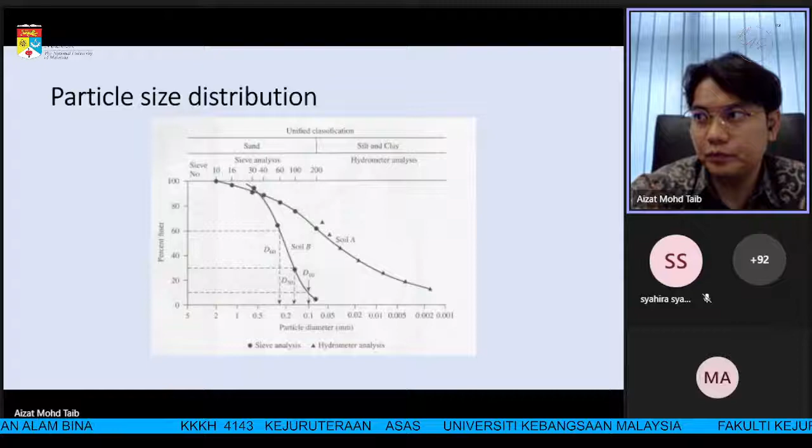This is the sieve analysis, conducted by taking a measured amount of dry soil and passing it through a stack of progressively finer sieves with a pan at the bottom.

So when you run your sieve analysis, at the bottom there must be a pan. If it's not a pan, everything will go off and there's no point. You still get the grain sizes in between, but except for the bottom, if you don't use a pan, you don't get the smaller sizes.

The amount of soil retained on each sieve is measured, and the cumulative percentage of soil passing through each is determined, referred to as percent finer.

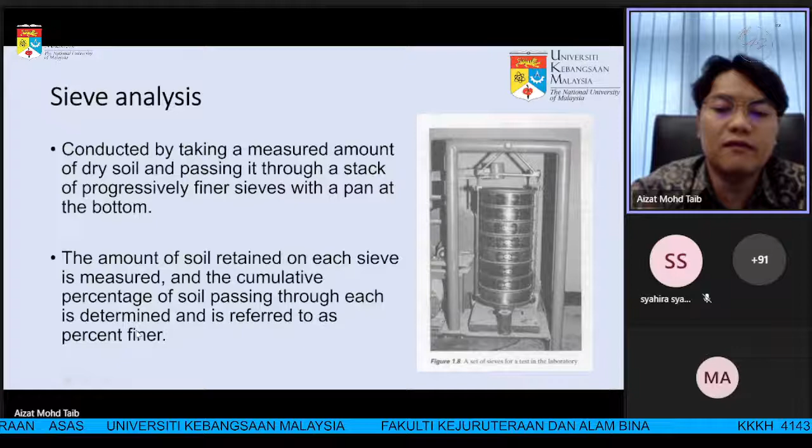Geotechnical properties of soil: percent finer for each sieve is determined by sieve analysis and plotted on semi-logarithmic graph paper. Imagine if you don't use a logarithmic graph pad.

Let's say this distribution is very far apart. Imagine if you use an even scale, so maybe 10 here, 9 here, then here will be the same decimal number. The curve would be forever long until the end. That's why you have to use logarithmic paper.

Notice that grain size diameter D is plotted on logarithmic scale and the percent finer is plotted on arithmetic scale. So this is arithmetic, this is logarithmic.

Two parameters can be determined from the grain size distribution: the uniformity coefficient, Cu, equals D60 over D10. So you go to 60% and 10%.

You can get the uniformity coefficient, and the coefficient of gradation or coefficient of curvature, Cc, equals D squared 30 over D10 times D60. These are all percentages - you've done this already in your lab work and soil mechanics. D10, D30, D60 are the diameters corresponding to percent finer than 10, 30, and 60% respectively.

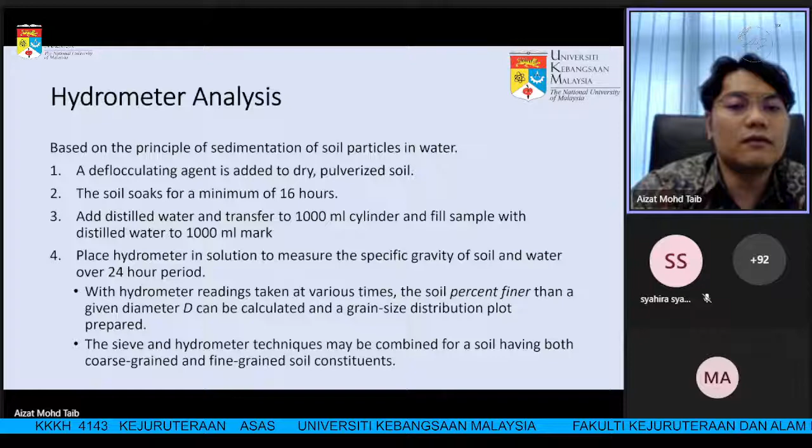All of this, when you run it in the machinery, they are doing it for you. At the end of the day, you're just going to get your fine grain size distribution. I leave this to you - I'm pretty sure you can read and revise again what you have done before in the hydrometer analysis.

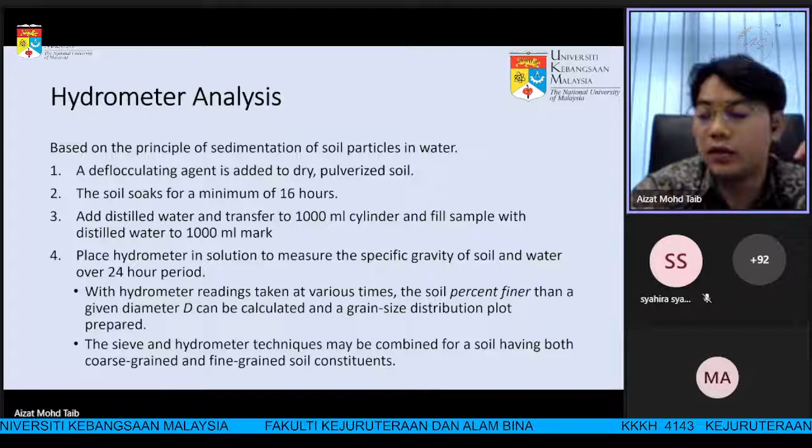Size limits for soils: several organizations have attempted to develop size limits for gravel, sand, silt, and clay on the basis of grain size present in soils. So we use AASHTO or USCS. AASHTO is the Association of State Highway and Transportation Officials, so mostly people in the roadway or road path will use AASHTO.

A unified soil classification system is more for other respective purposes. Now, Atterberg limits - it shows your liquid limit, your plastic limit, your shrinkage limit.

It shows your soil formation - when clay soil is mixed with an excessive amount of water, it may flow like semi-liquid. If you have a little bit of water, your soil tends to bind together, but if it's completely dry, it's very hard for them to bind. So if the soil is gradually dry, it will behave like plastic, semi-solid, or solid material depending on its moisture content.

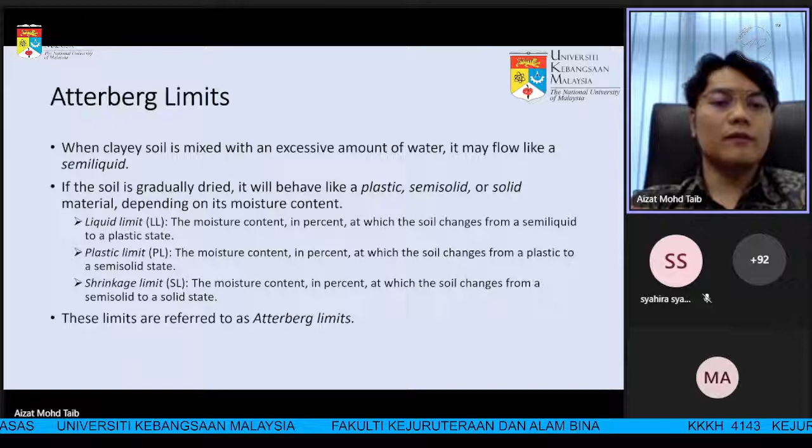LL is the liquid limit, plastic limit is PL, and shrinkage limit is SL. I'm pretty sure you know all this - these limits are referred to as Atterberg limits.

Liquidity index is the relative consistency of a cohesive soil in its natural state. Li equals W minus PL over LL minus PL, where W is the in situ moisture content of soil.

What is the unit for moisture content? Anybody? E? Huh? E. I'm asking about the unit, not the symbol. Symbol is W, water content is W. What is the unit for water content?

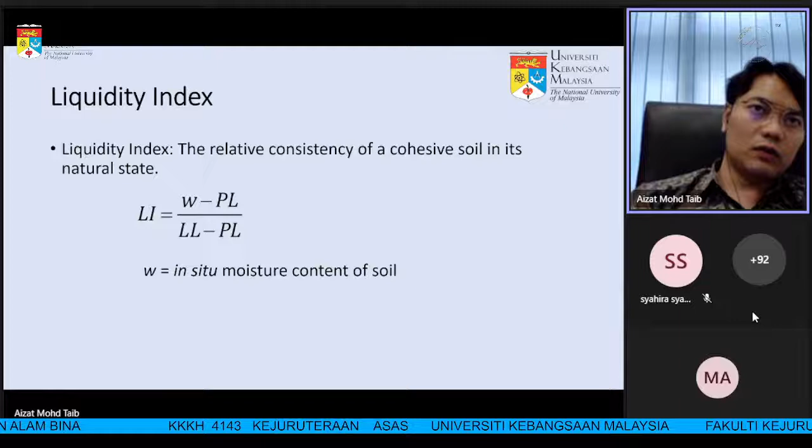Percentage, okay, very good. Water content - the unit is in percentage. It's not in kilograms, not in grams, not in weight, not in other units, but percentage. So how much water in a specific amount of soil is calculated in percentage for moisture content.

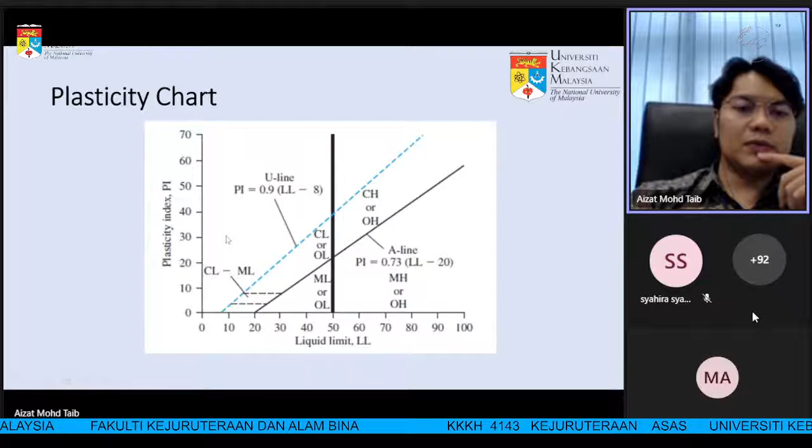Plasticity chart - this depends on your soil group. You have CL, ML, CH, OH, and PI determines where you are. It's plasticity index PI against liquid limit LL.

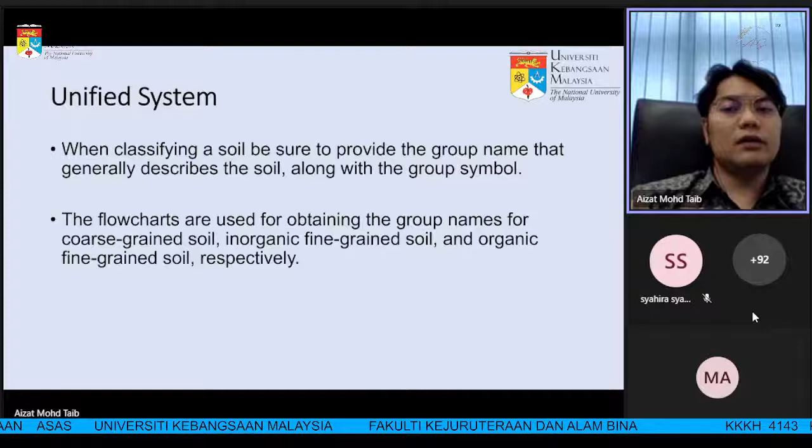So if you do your sieve analysis, you know how much percent for coarse grain, and then you decide whether it's gravel or sand, whether it's clean gravel and clean sand or sand with fines. It all depends on your percentage.

If it's fine grain soil, you use this one: 50% or more passes the number 200, so if it passes 50%, it's fine grain. If it's less than 50%, it's coarse grain. Then you have the silts and clay, whether the liquid limit is less than 50 or more than 50. At the end of the day, you get your group symbol and then your group name, and all the respective procedures can be seen here as well.

So your coefficient of uniformity, CU, is D60 over D10, and then your CC is this one. So all of these are here.

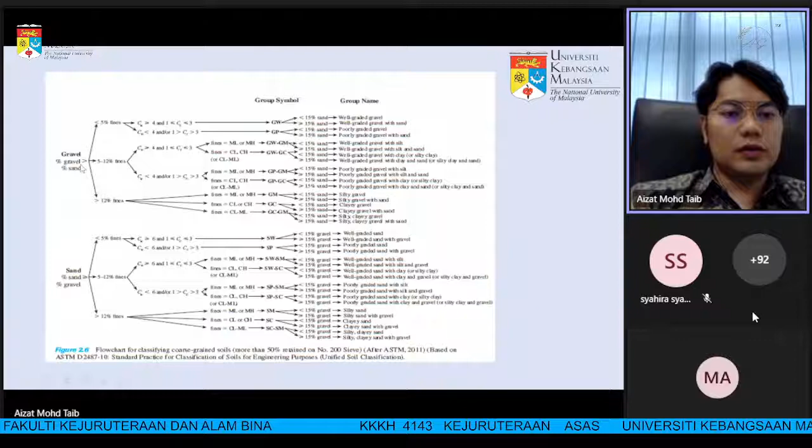And then the group symbols and group name depend on the sand and gravel percentage as well. So, the unified system, symbols of the unified system, are the following. I'm pretty sure you understand them.

Weight volume relationship. You've done this before. Soils are a three-phase system consisting of solid particles, water, and air. The phases can be separated, and based on the separation, the volume relationship can be defined.

So you have your volume and weight on this left side. V is volume, W is weight. So volume equals to what?

Anyone? Doktor, apa tadi? Volume equals to what? V equals to E? What ratio? Saya tanya pasal V, the big V. This big V equals to what? V equals to W? Okay, that's good, but I want answers in volume. So big V equals to how many V's? 3 V's.

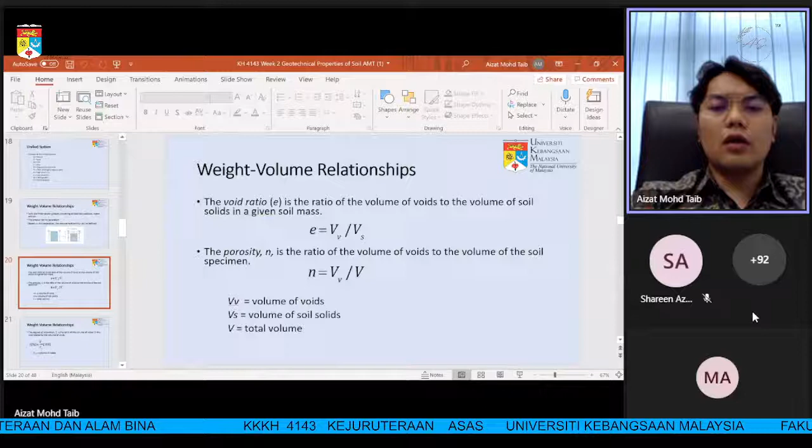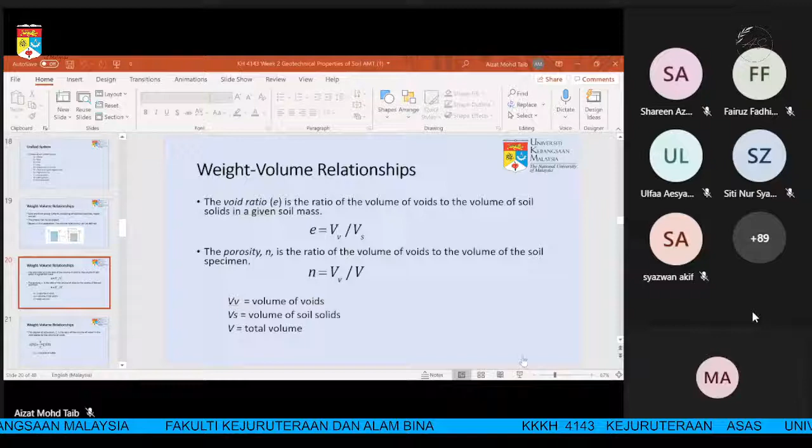Water, air, and solid, with VB. V equals to V air, V water, V solid. W equals to WA, WW, WS. Same also, W is equal to W air, W water, W solid.

WA is equal to 0, because air doesn't have weight. Betul ke dia tak ada weight? Awak rasa? Rasanya betul tu doktor. So WA is equal to 0. So air, the weight is negligible. We assume the weight is negligible.

So for W, we calculate WW plus WS only. What is WW? Weight of water. What is WS? Weight of solid. What is VV?

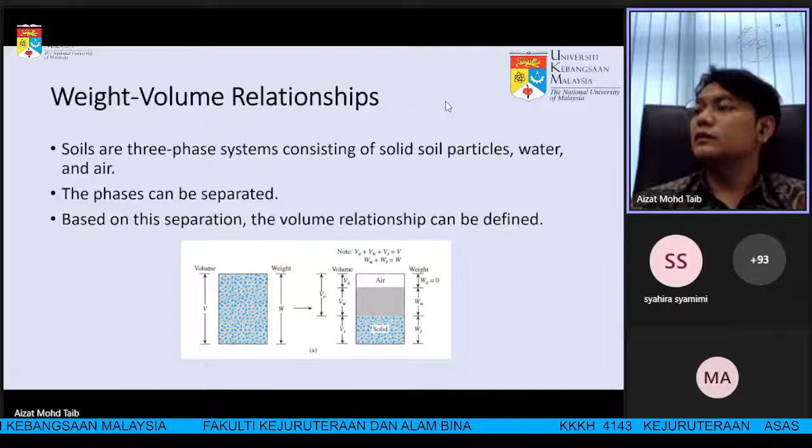Volume void. What is volume void? Adila? What is volume void? What is VV? Volume void is volume air plus volume water.

Sohail? Sohail ke Suhail? Suhail, where are you? Sivanesan. Siva, where are you? Ya, doktor, how many phases do we have? Doctor, I can't hear properly, the line is lagging. How many phases do we have in soil? Siva. Rizwan, ya doktor. How many phases do we have in soil? Three, doctor. Okay, they are? What are they? What are the phases? Solid, liquid, and gas, doctor.

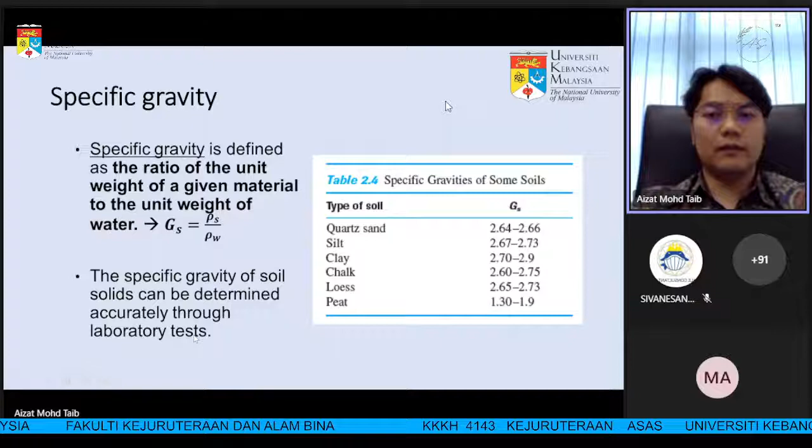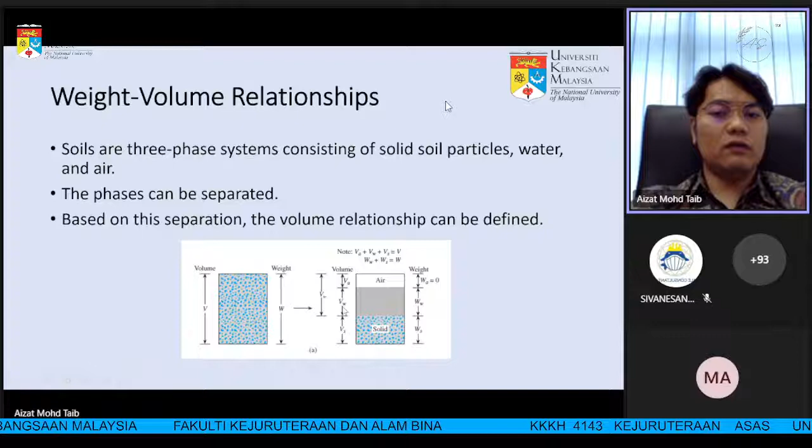So as you can see, this is the weight-volume relationship. Knowing all this, you can derive from the main equations, like VV equals VA plus VW, and W equals WW plus WS. You can derive and form other equations from all of this.

Such as WS equals GS times gamma water. What is WW? WW means GS gamma water times water content, and with 1 plus water content you can simplify this.

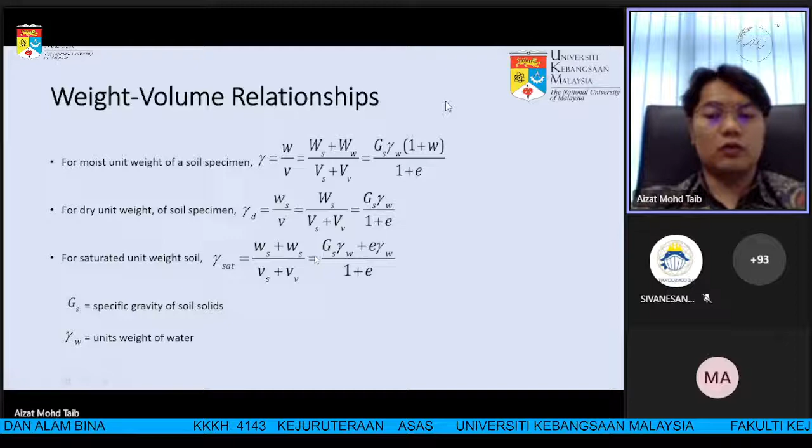This is for dry unit weight, this is for saturated unit weight. You've done this before, this is just recap, you can read this on your own. Various forms of this relationship, you're well aware of this, you've used this before. It's just a matter of different derivations, depending on what properties you have.

Let's say you want to calculate dry unit weight with water content - this is the equation. If you want dry unit weight with specific gravity and void ratio, this is the equation. If you want to calculate with saturation, this is the equation. It's the same for all of these.

Soil compaction, relative density. For granular soil, the degree of compaction in the field can be measured according to relative density. E max is the void ratio of the soil in the loosest state, meaning the void ratio is at its highest - very, very loose. E min is when it's the densest.

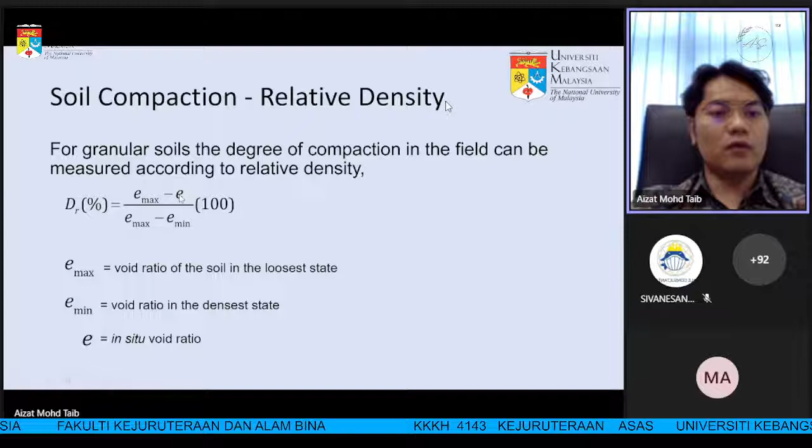When you have different void ratios, the relative density is E max minus E, over E max minus E min, times 100%, where E is the in situ void ratio. The equation is E max minus E min equals 0.23 plus 0.06 over D50 in mm.

D50 is the percent finer for 50%, and then you find at what size that occurs.

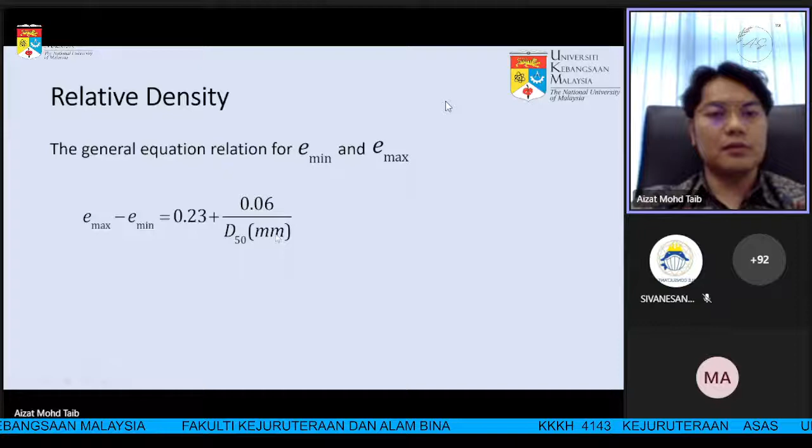Hydraulic conductivity is about water flowing through your soil. You've done this before in the lab, so you understand permeability. Permeability is in relation to hydraulic conductivity. Water flows between void spaces or pores between soil grains. Knowing how much water is flowing through soil per unit of time is important for soil mechanics and foundation engineering.

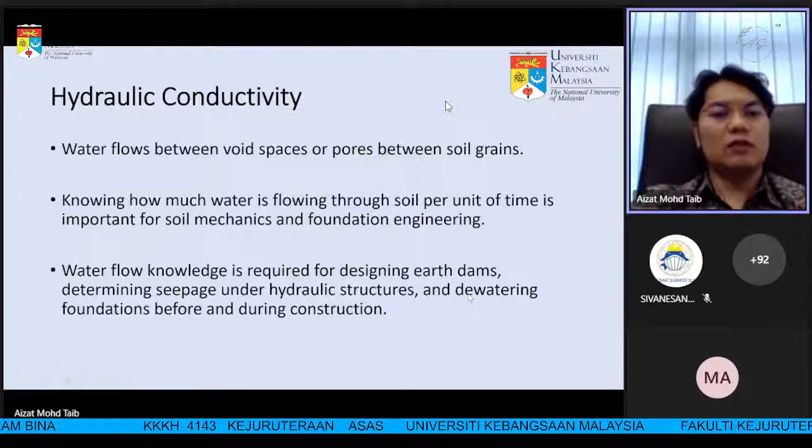Imagine if you do seepage analysis, you have to know how much water is passing through the soil. So it must be a rate, how much water over time. Water flow knowledge is required for designing earth dams, determining seepage under hydraulic structures, and dewatering foundations before and during construction.

The equation is V equals to KI. It's used to calculate the velocity of flow of water through soil. I is the hydraulic gradient. You cannot have water flowing without a gradient. If the gradient is all the same, there's no hydraulic gradient, you cannot have water flow.

Imagine if you have one container, and there is no difference in the hydraulic gradient, no difference in the height, so there's no flow. But when you lift the container slightly, a little bit higher on one side, then you will start to see the water moving. It is because you have the hydraulic gradient.

Hydraulic conductivity is the coefficient, and Darcy velocity is the rate of hydraulic conductivity. Hydraulic gradient is defined as I equals to delta H over L. As you have changes in the height, changes in the head between two sections, then only you have water flow. So I is delta H over L.

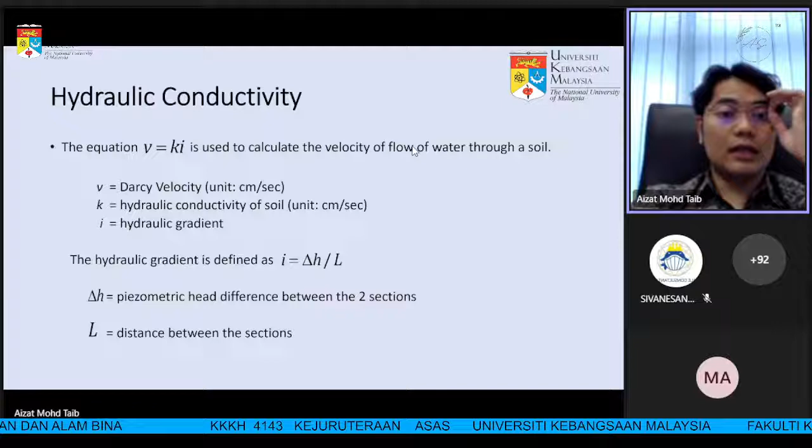L is the distance between the two, clay and coarse grain. So as you can see, between coarse and clay, and between coarse and finer material, which one will allow water to pass more and faster?

What was the question again, Doctor? In between coarse and finer material of soil, which one will allow water to pass faster and easier?

Coarse. Okay, so imagine if you're by the beach, if you pour some water, you can see that the water easily seeps into it and goes way deep under the ground. But if you pour water on clay material, let's say after rain on a football field, sometimes you see a pool of water in between the grass, because the soil is either peat or clay material. So it doesn't allow water to pass through easily. That's why you have that pool of water.

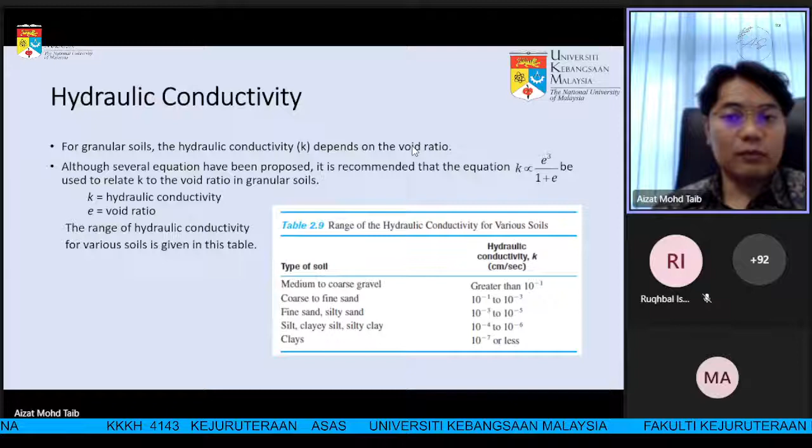So every soil particle will have a different type of hydraulic conductivity. For steady state seepage, in most cases of seepage under hydraulic structures, the flow path changes direction and is not uniform over the entire area.

When you have a difference in hydraulic gradient, the water will follow where the lower gradient is leading to. Imagine you spill water, it will move following its hydraulic gradient. So for most cases of seepage under hydraulic structures, the flow path changes direction and it's not uniform over the entire area. It depends, it's not uniform.

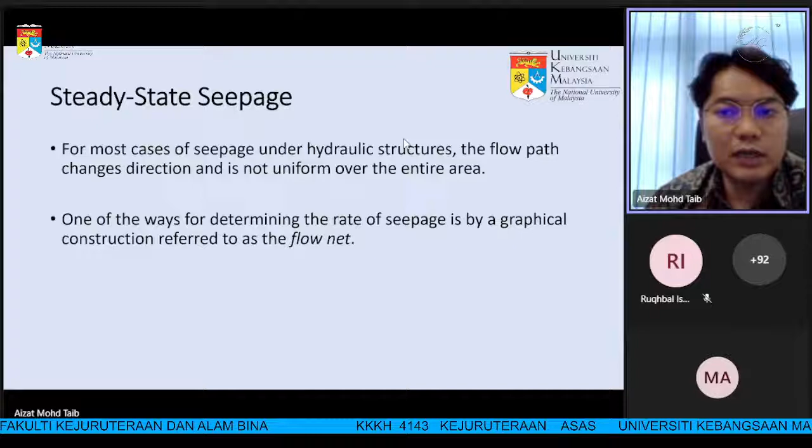One of the ways for determining the rate of seepage is by graphic construction referred to as flow net. We've done flow net before. How do you draw the flow net? If you remember in flow net, what is the most important thing?

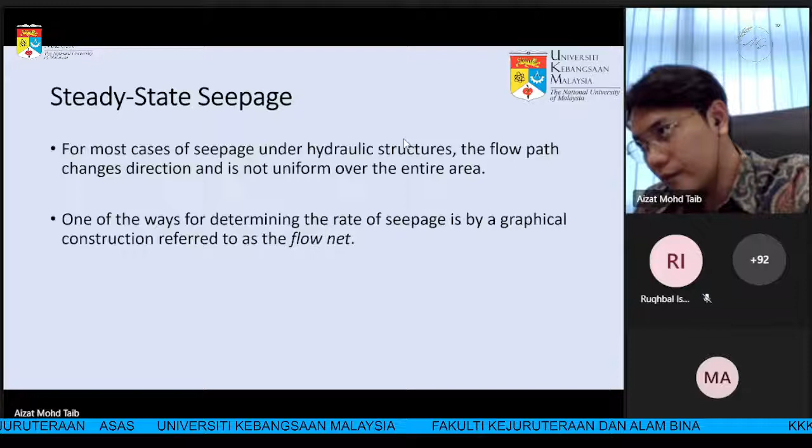Do you remember which part of the flow net? Still remember this? I don't remember, Doctor. Did you take my class online or in person? In class, Doctor. If it was my class, I'm pretty sure I actually taught you how to draw on the blackboard so many times, on the whiteboard. If I give a quiz now, should I give everybody 0?

Yes Doctor, there might be. Okay, so what is the most important thing in drawing a flow net? Do you remember what I said? How do you determine the flow in flow net? Does no one remember?

Flow line. How do you make the flow line? How do you make the equipotential line? 90 degrees. What is it? Say it again. Degree from flow line, equipotential. Any other answer?

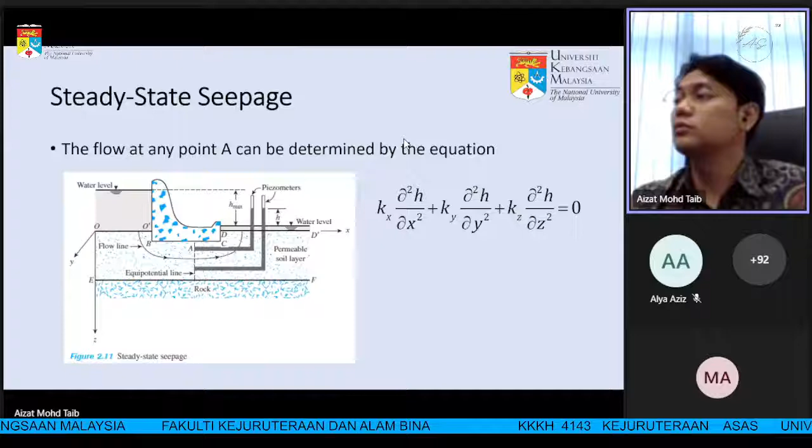Sarah Fitri? Syaimah? Don't remember how to draw the flow net? Mirul Ashraf?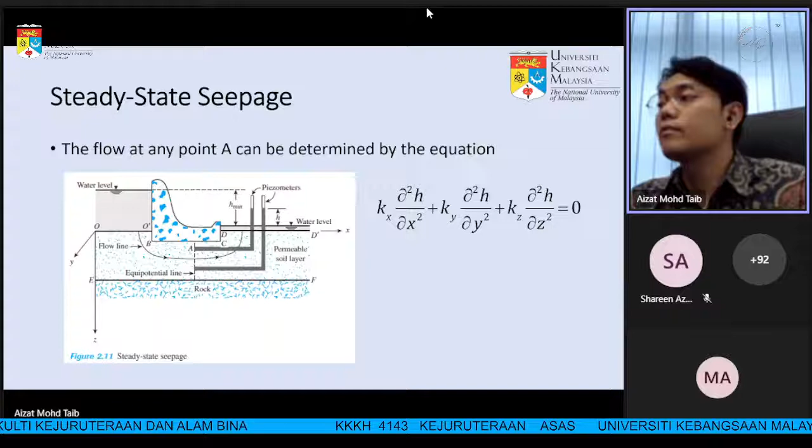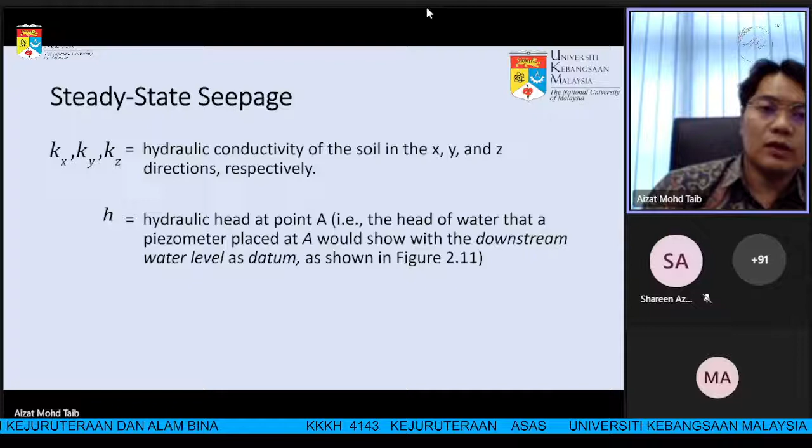Steady state seepage. You have Kx, Ky and Kz, the hydraulic conductivity of soil in the X, Y and Z direction. You have axis X, axis Y and axis Z, so it goes into three-dimensional flow. From the hydraulic conductivity, you have flow in these three directions.

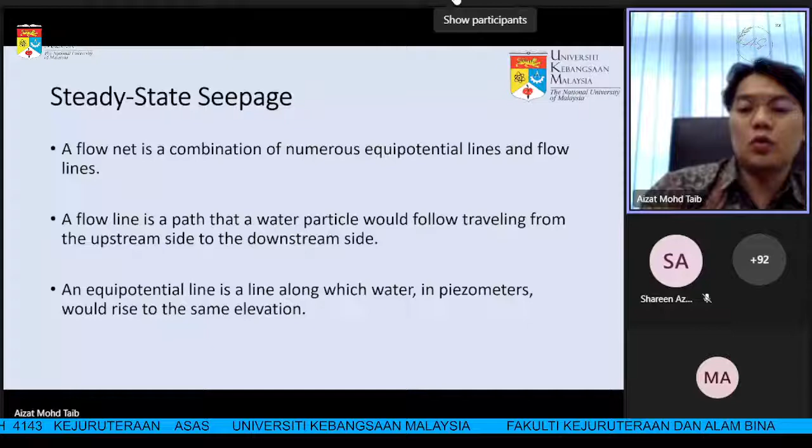A flow net is a combination of numerous equipotential lines and flow lines. A flow line is a path that water particles travel from upstream to downstream — water goes down from top to bottom. An equipotential line is a line along which water in piezometers would rise to the same elevation. But how do you draw the equipotential line and the flow line? Your friend said you draw them as squares, but how do you make sure they are squares? I'll wait for the answer in the next class.

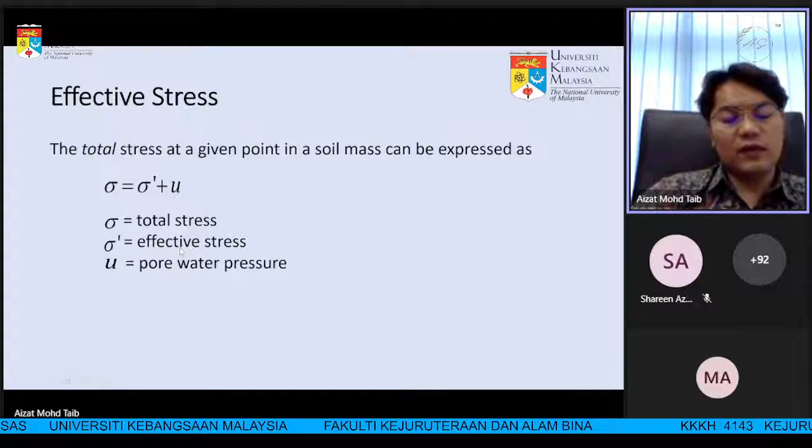Effective stress: the total stress at a given point in soil mass can be expressed as sigma equals sigma prime plus U. Sigma is total stress, sigma prime is effective stress, and U is pore water pressure. To get the effective stress, you take the total stress minus the pore water pressure. So to get the soil's effective stress, you just subtract the water, the pore water pressure, to get the effective stress.

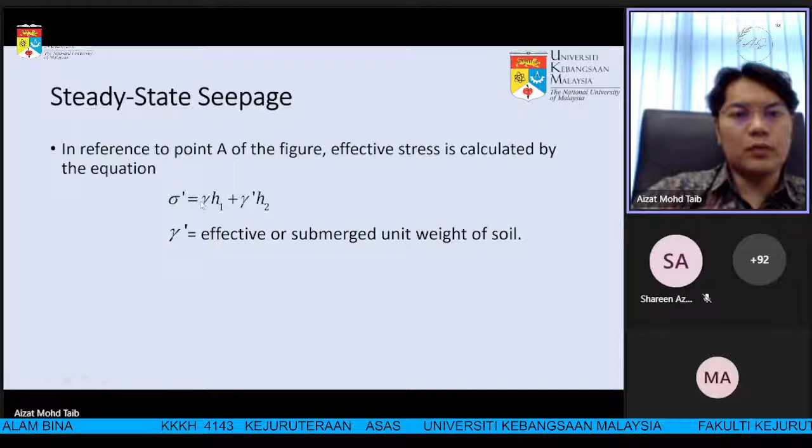Steady state seepage: in reference to point A in the figure, effective stress is calculated by the equation sigma prime equals gamma times H1 plus gamma prime times H2. This is H1, this is H2. So if you multiply gamma by H1 and gamma prime by H2 and add them together, you can get the steady state seepage.

Consolidation happens when you apply load for a certain time, and it allows the stress to stabilize. When stress on a saturated clay layer is increased, for example by the construction of a foundation, the pore water pressure in the clay will increase. When you have stress on saturated soil, the pore water pressure increases. The hydraulic conductivity of clay is very small, so it sometimes takes time for the excess pore water pressure to dissipate and for the increase in stress to be transferred to the soil skeleton. When pore water pressure is confined and you still apply load, it has to find a way to go somewhere — it's transferred into the soil skeleton.

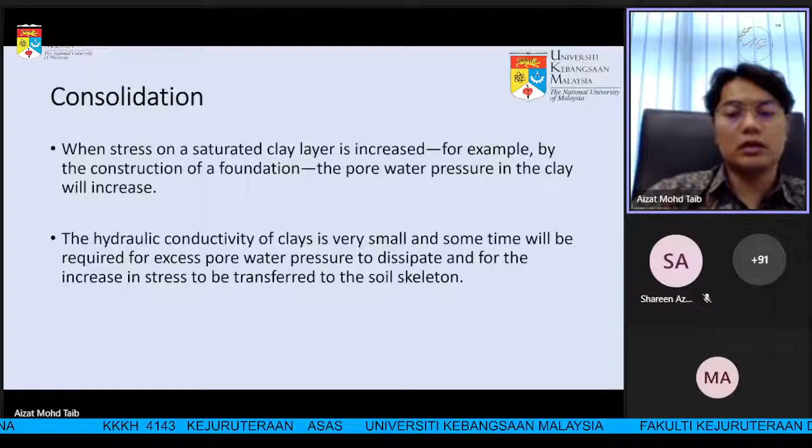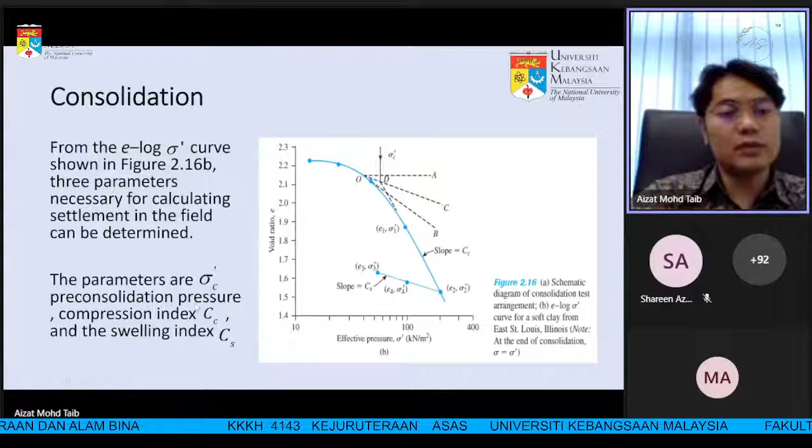Consolidation — I think you already know this, you've done this before. It's effective pressure against void ratio. Slope CC is the stiffness, the compression index. CS is the swelling index. And sigma prime C is the pre-consolidation pressure. Alright, I don't have to go through this.

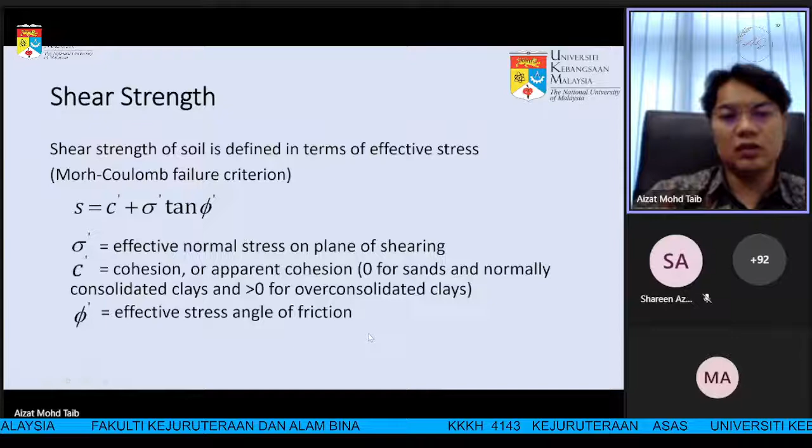Very good. So, how do you calculate shear strength? You've done the lab test, the direct shear test. Direct shear test means you clamp two blocks of soil together and slide them against each other — you shear it. You calculate how far it can go, and that is your shear test. Then there's the triaxial test, when you have soil wrapped in a membrane in water, right?

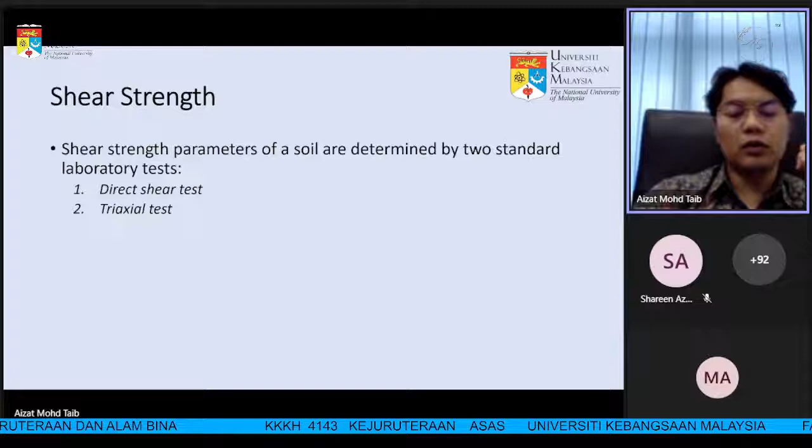And then you see the changes when you allow water to drain or apply load. Okay, so direct shear test: this one goes left, this one goes right, and then you push. What you get is the effective normal stress against shear stress.

Dry sand can be tested by direct shear test. The sand is placed in a shear box that is split into two halves. First, a normal load is applied to the specimen, and then a shear force is applied to the top half of the shear box to cause failure in the sand.

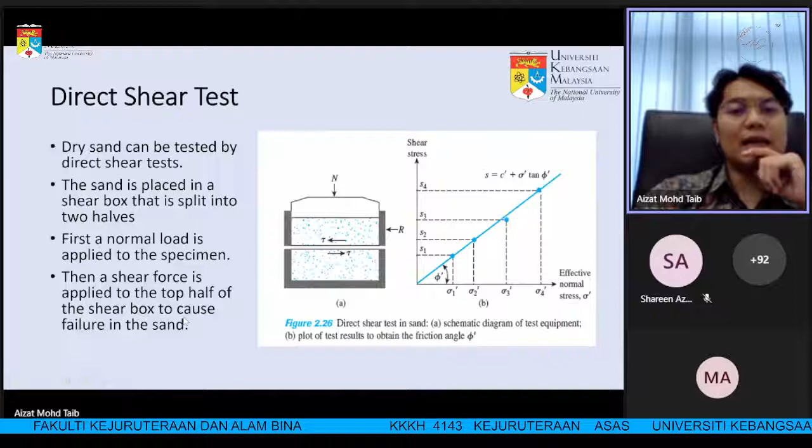Direct shear test is something like this. You've seen this before, you've been to the lab, you've seen all this soil in membrane. And then they allow stress to develop because of the confining water.

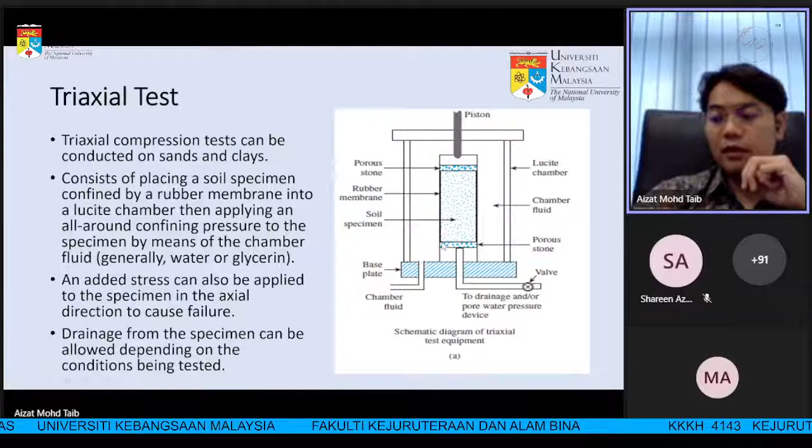So triaxial test can come in three types: consolidated drained, consolidated undrained, and unconsolidated undrained. Drained means you take the water out, undrained means you don't take the water out, and unconsolidated undrained means you don't consolidate and you don't take the water out.

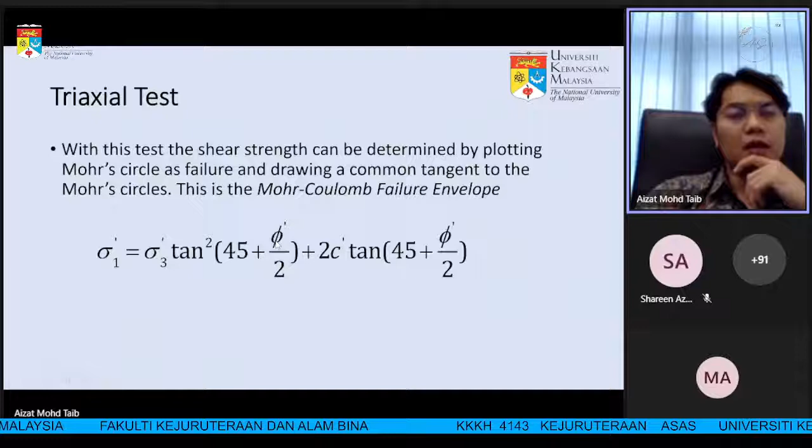So for triaxial test, sigma prime 1 equals sigma prime 3 tangent squared of 45 plus phi prime over 2, plus 2c prime tangent 45 plus phi prime over 2. So 45 plus phi prime over 2 is the same term. This is actually... I've forgotten what this is called. But the most important thing is sigma, which is the loading, phi is the soil angle of friction, and c is your cohesion.

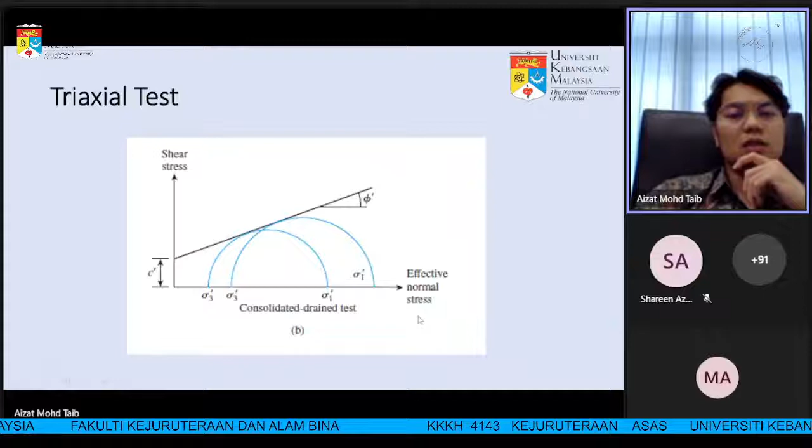Alright, consolidated drained test. And that's all for recapping what you've learned in soil mechanics. I know it's actually quite a fast topic, but you've learned this before. So what I'm trying to tell you is that if you feel that you cannot follow, it means that you have forgotten what you've learned in soil mechanics and geotechnics.

So kindly revise before we move on to your advanced calculations in foundation. Because after this, we will start subsoil exploration, which is still theory. Shallow foundation has a lot of calculation, vertical stress increase as well, settlement, pile foundation is the toughest - pile 1 and pile 2, lateral earth pressure, retaining wall, embedded wall, soil improvement, and then you have a group project. Shallow vertical stress settlement is very tough.

So remember your shear strength. Remember your phi, your c, your angle of friction, your unit weight. Okay, right? So any question?